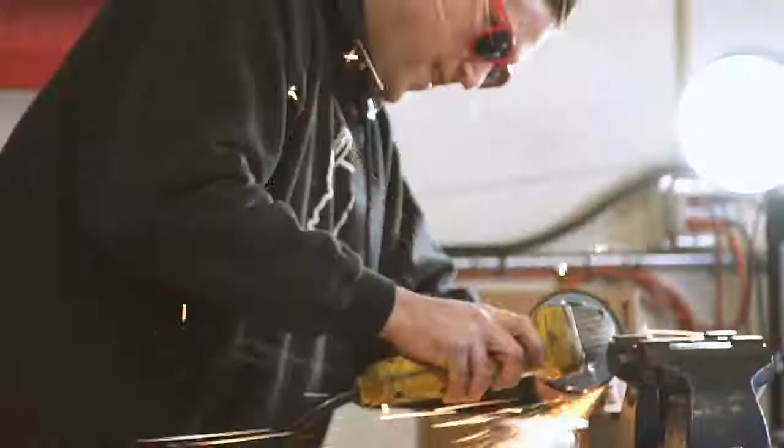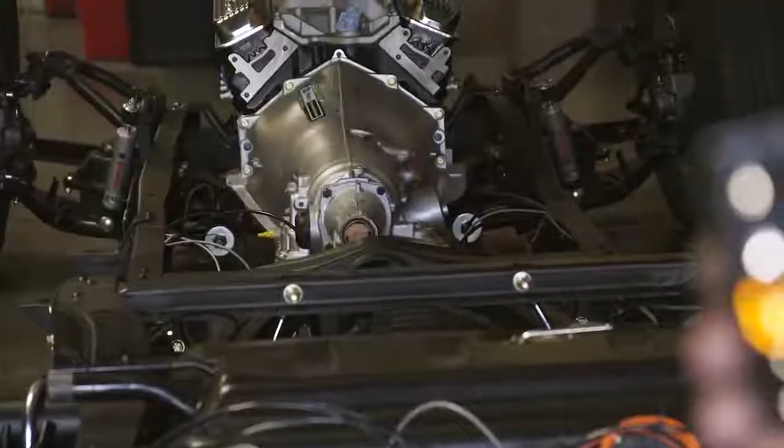Working on Dino's 1965 Chevy Suburban, finishing up the suspension on it now, frame off. So we've got all of it as a roller now here in the shop. Gonna put some AccuAir E-level on this one. We don't always get to install the E-level portion of it, but that's always the nice upgrade. The auto leveling system and the height sensors just take all the guesswork out of it, make it a really, really nice, reliable system. This was one that started out to be kind of a backwards build.

I was just going to do kind of a cool OG style stock truck, and then it kind of got boring. So that's when I got a spot with Switch, and I asked them to save me a month so we could finish it up. So we then pulled the chassis on it.

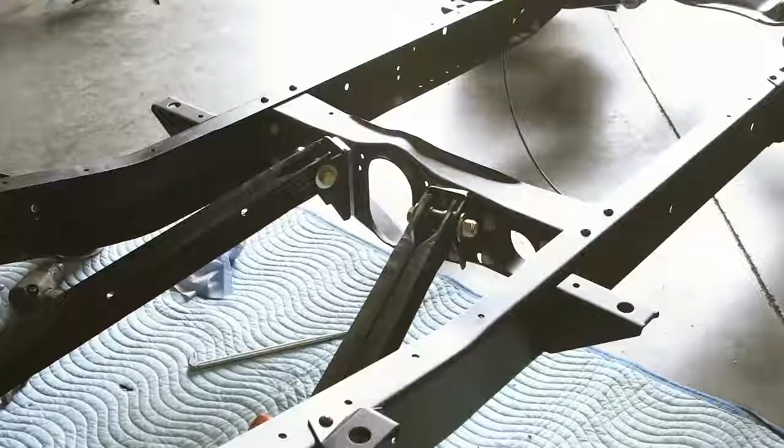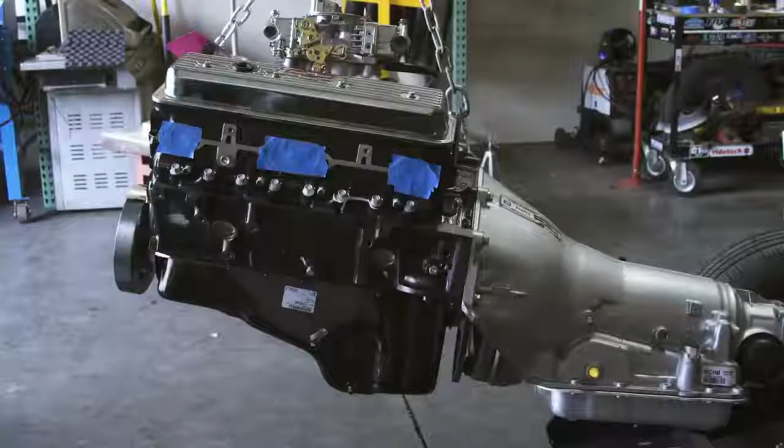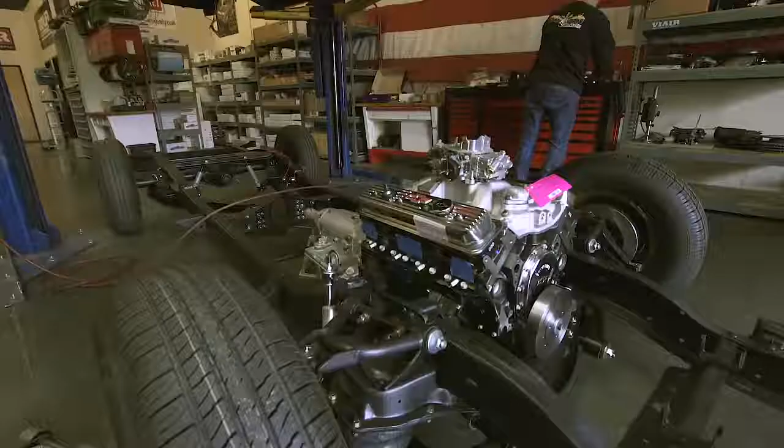So far, we came through, we put RideTech shocks on the front, Firestone 2600 series bags, RideTech strong arm control arms. That's all on a pancaked 2-inch pancake crossmember. McGaughy's 2.5-inch drop spindles, and that combination should allow this truck to lay the frame on the ground.

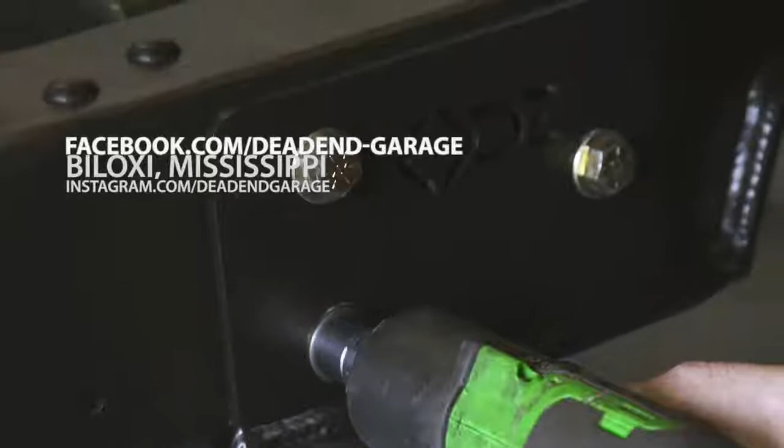The rear, we use some pretty trick little parts from Dead End Garage. The nice part about Seth and these guys, they like to use the best parts. And going with RideTech, I dig their stuff. I've used it on lots of stuff. This is the first thing I did the whole thing with, and of course AccuAir, don't get any better than that. This is also the first time for AccuAir that I did a full sensored truck.

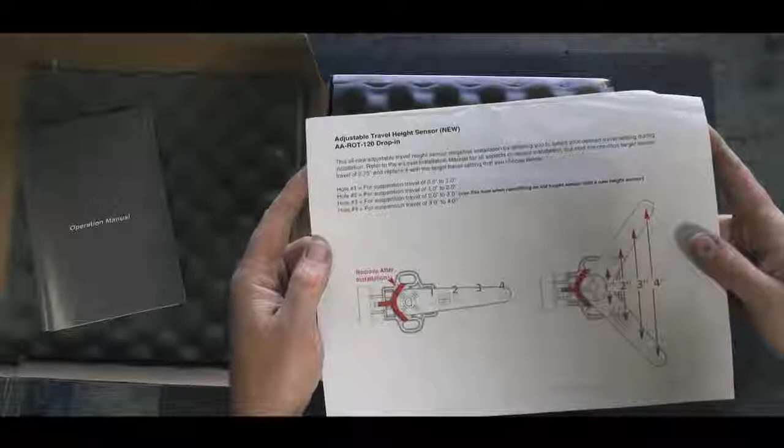Their installation manual, operation manual is the craziest thing. I mean, it's 30 pages long. Everything makes sense in clear written English. It's hard to mess this product up.

This is a sensor harness.

So here's the hardware. It's always bagged nicely. It's just bitching the way they do it. Everything's labeled perfectly. It's everything you need, nothing you don't. There's one for each corner, all bagged individually. Always have lock washers or locking nuts, washers on the face. They just go above and beyond.

Here's your height sensors. You got one on each corner of the vehicle, so 4 total. That's what tells your suspension where it's at in the travel.

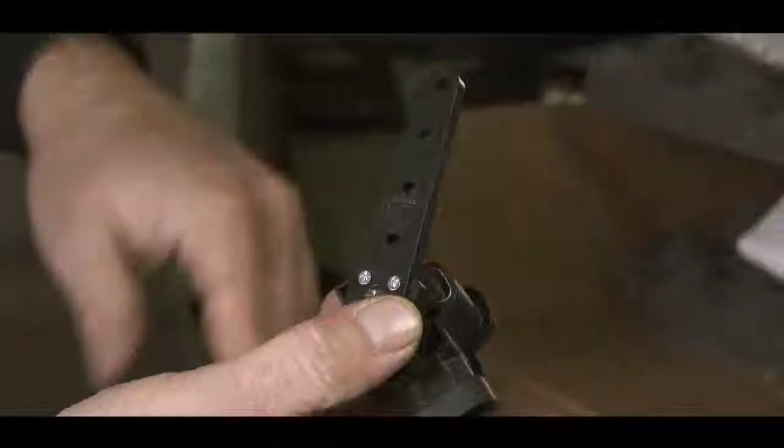Okay, so this plug here is for your controller. So that'll plug this end in, the other end's a USB. It'll go up to the interior and mount your controller into there. On Dino's Suburban, we're gonna mount that in the dash. A company, I think CTP Concepts, makes a bitchin' little plate for these 60 to 66 trucks. This mounts right on the dash, super clean. So we're gonna go ahead and use that on this build.

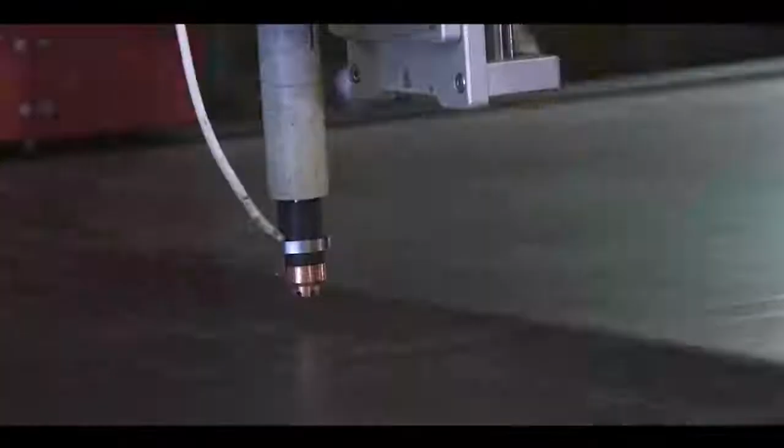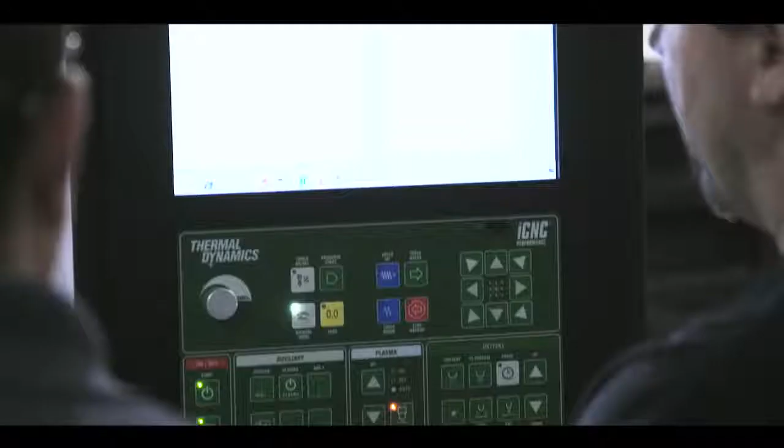Five by 10 plasma table with a water bladder system. Runs NEMA 34 servo motors with a 10-to-1 planetary gear set. Rack and pinion uses our precision linear guide rails. Ball screw on the torch mount, collision sensors. This machine has a PowerMax 85. It runs the iCNC performance controller from Thermal Dynamics. Powder coated finish on the table and the gantry. We're gonna cut some plate for you guys today.

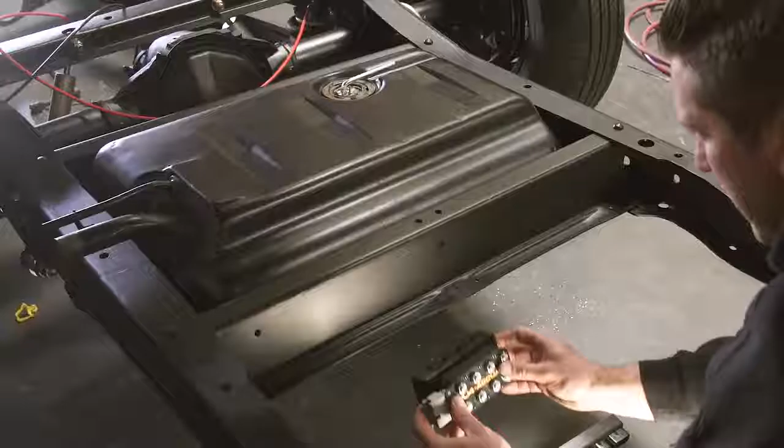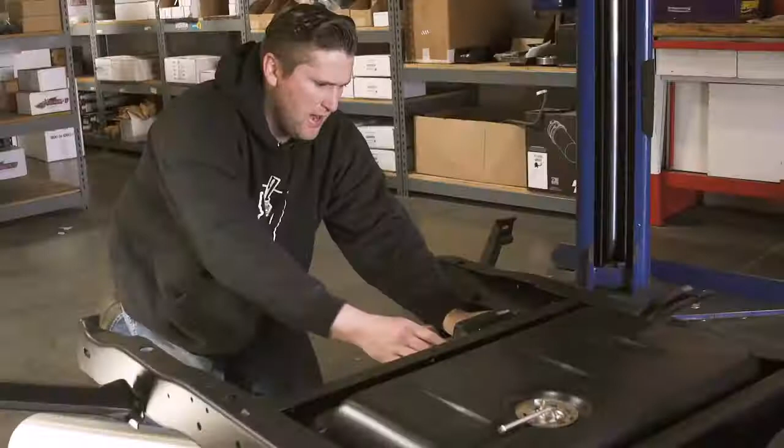I think we'll be able to make that work. So this is the VU4 valve. We want to make sure that it's in a spot that's not going to get hit with road debris, water, anything else that could come in contact with it, and make sure that it stays clear of where the floorboards are going to be.

AccuAir computer, ECM. We'll try and mount that on the cross member as well. After that, then we just have a tank and compressors, and then we should be done.

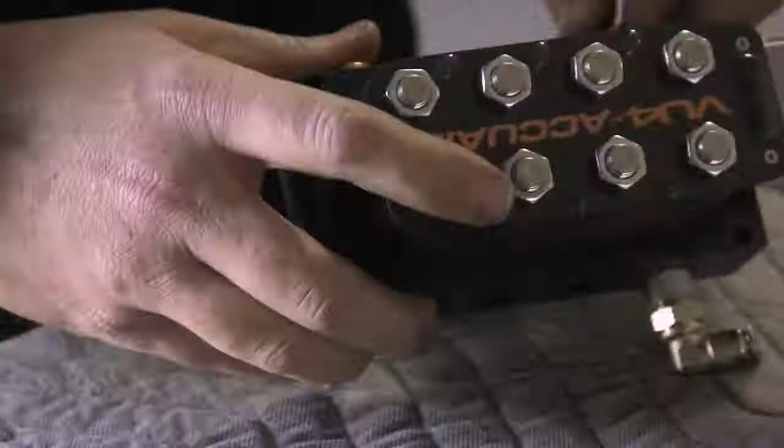I'd say plug one side. I don't want to run two inlets, just plugging off one of the inlets. There's two inlets on them, so you can come from whichever direction you want. Since we're going to come from the passenger side of the truck, we'll block off the driver's side. Now the instructions say use a drop.

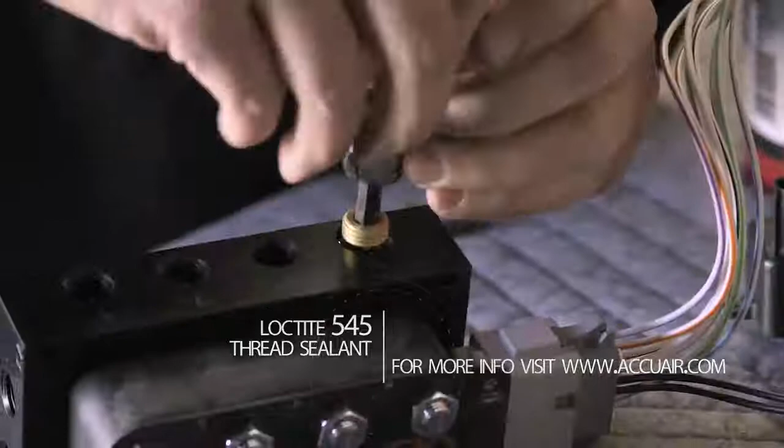The 1, 2, 3, 4 on the side of the valve is going to be the same as your wire numbers. There's going to be your sensor 4 as they labeled it there, and obviously that's going to go to number 4 on your port. And that'll go to the passenger rear, number 4, right? Yeah, so number 1 will be the driver front. That's that.

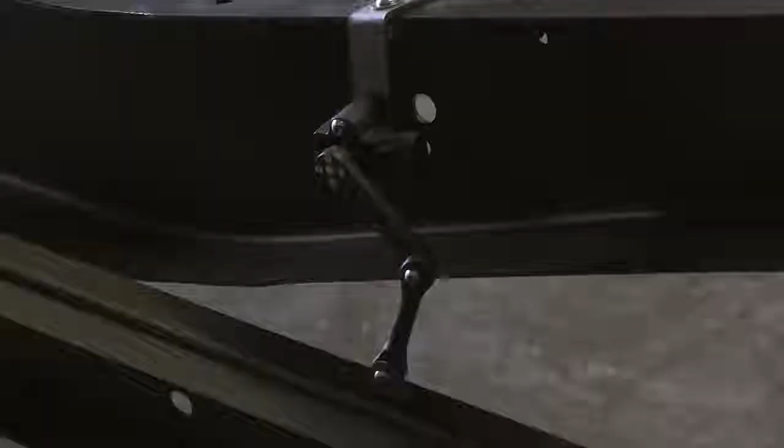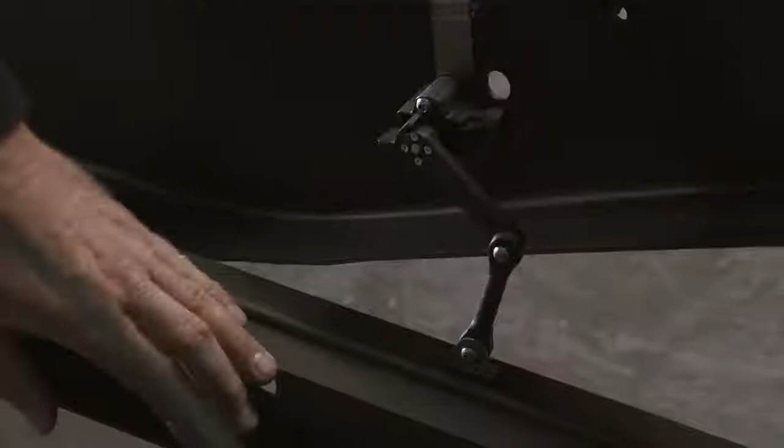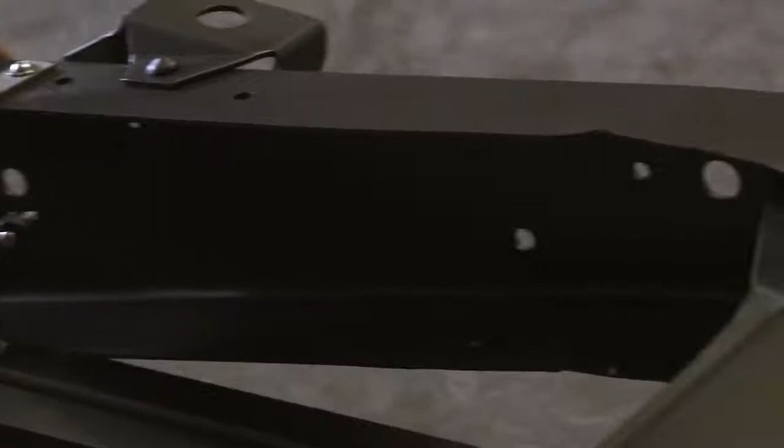So AccuAir supplies you with these gauges that you put in there for mock-up, and you want to make sure that the travel on the sensor is equal to the travel in the suspension. So right now we're all the way up, dead even where we want to be in our sensor travel. So when we air down, we want to make sure the bags are fully deflated and all the suspension's taken out. And again, we're very close to where we want to be in the range of motion for the sensor, matching that to the suspension.

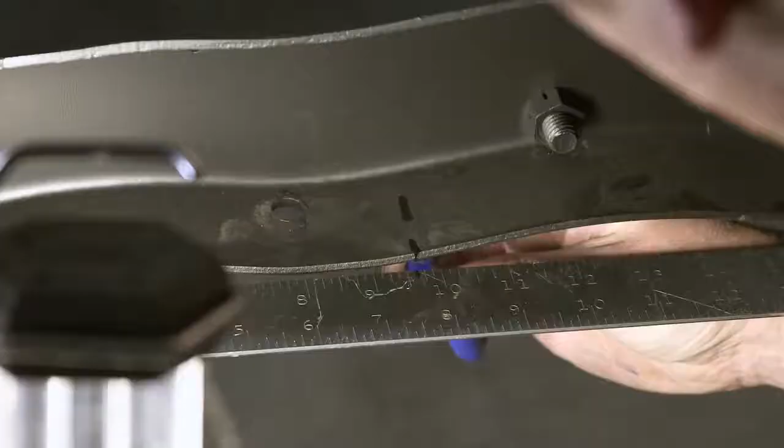Okay, so I don't want to go up. See, if I go up, I start hitting. Right, so that's got to be sideways. Drill a hole for our cross member.

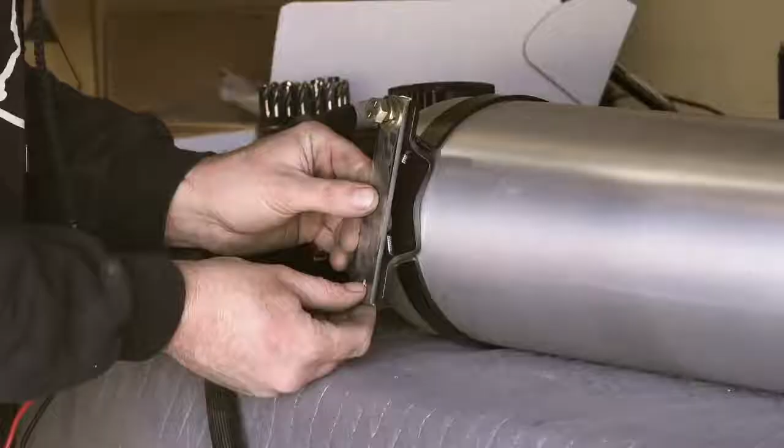Cool, man, that's it. 3 5/8. Okay.

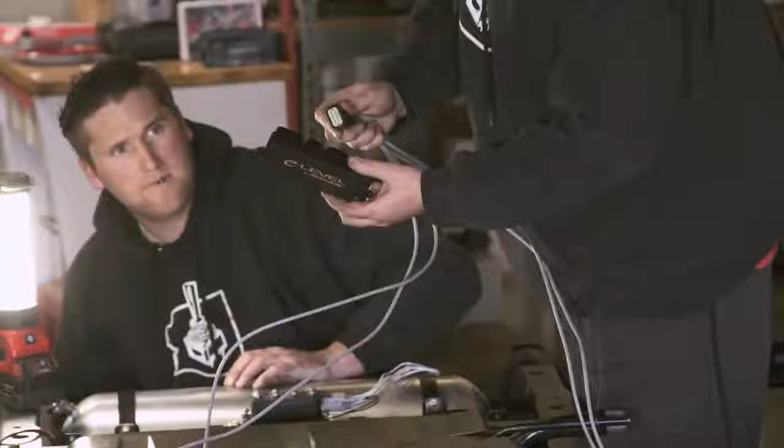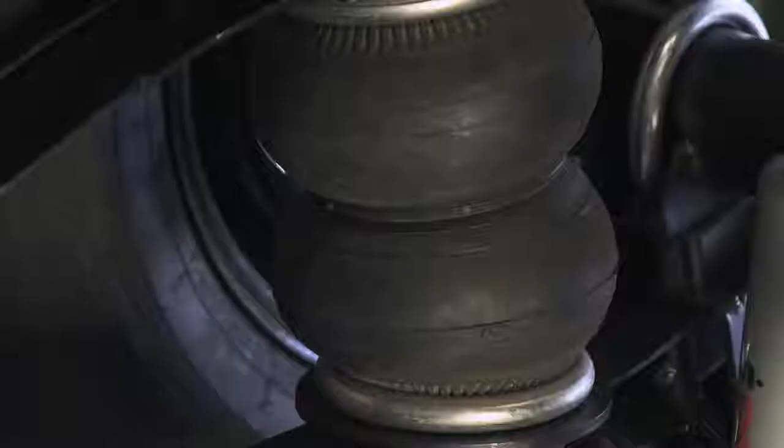So right now it's programming itself, so it's going to put a maximum amount of air in the system, and then it'll just cycle the travel. The sensors that we had mounted on each corner, it's going to watch that range and calculate it, and that way it knows exactly where the car is sitting. It'll pre-program your ride heights for you, and then you could change them if you wanted to. But generally it does a really good job of setting it where you're going to want it.

So right now it's lifting each side, each corner, to see what effect that has on the suspension. So what's going to happen is we're going to watch the vehicle go through its range of travel. It's going to do some testing all on its own and cycle the suspension. This test normally takes 5 minutes or less. So watch, you'll see it air out.

So sick, huh? I fucking love this. This never gets old to me, man. So cool.

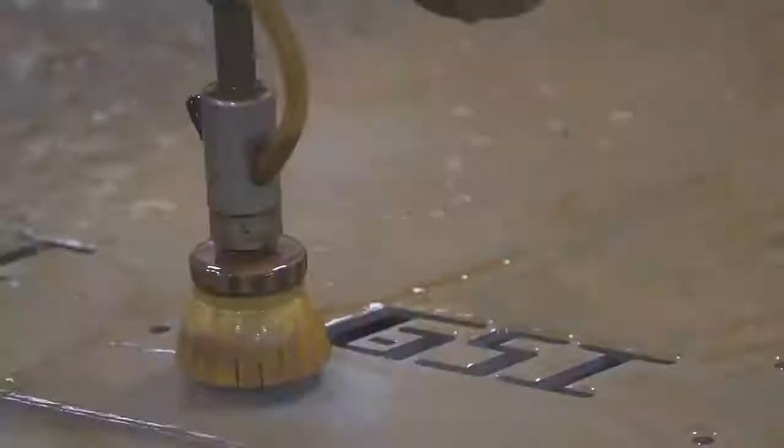Using this supplied template from the guys over at AccuAir, I was able to create this basic mount for our Endo VT.

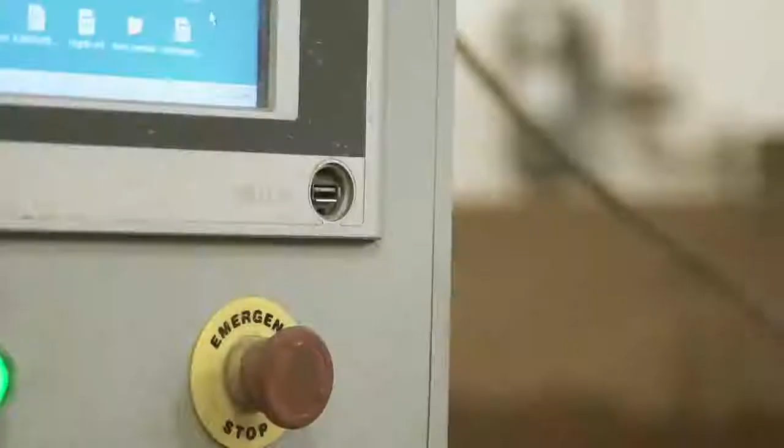What I'm going to do is take this file over to WaterJet, cut it out of some 3/16 plate, sort of fit it up to the back of our display chassis. We're taking it to LST in a couple days, and if all goes well, we'll be able to bolt the tank right to it, get it mounted, and have a nice, cool little setup for the show.

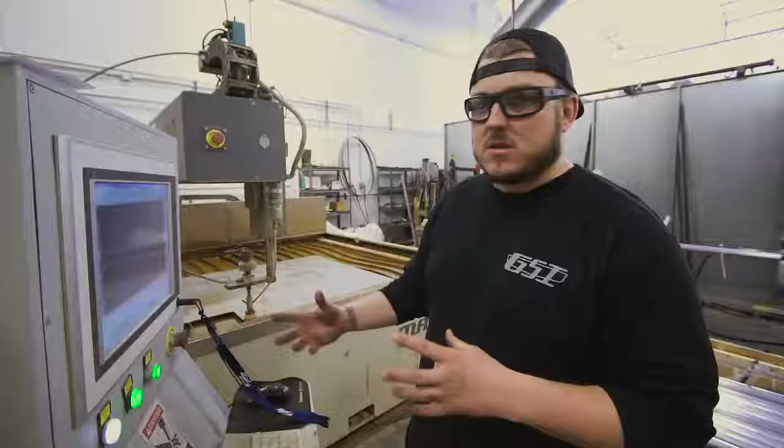All right, so now I got the file from the GibbsCam program, put it into a DXF format. I'm going to put it into this computer here, translate it into our flow software, create a cut path, send it to this water jet, and cut it out.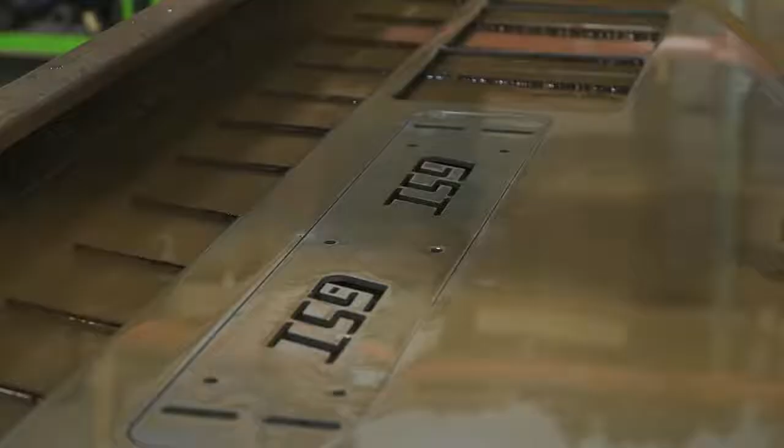We'll clean it up a little bit, see how it works.

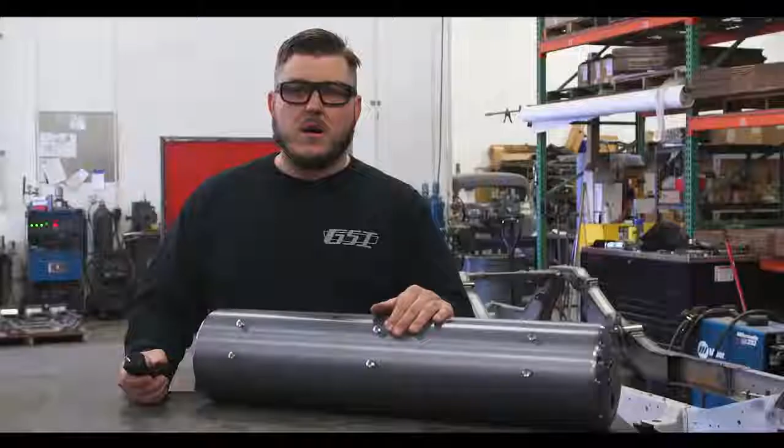Now that we have our mount fabricated and tacked onto the chassis, we'll take these feet, the little plastic mounts that AccuAir supplies with the endo tank. You bolt them to your mount, then drop them right in place. You can rotate the tank and they click right in place. A set screw keeps everything nice and tight so it won't move around, vibrate, or rattle. This is nice.

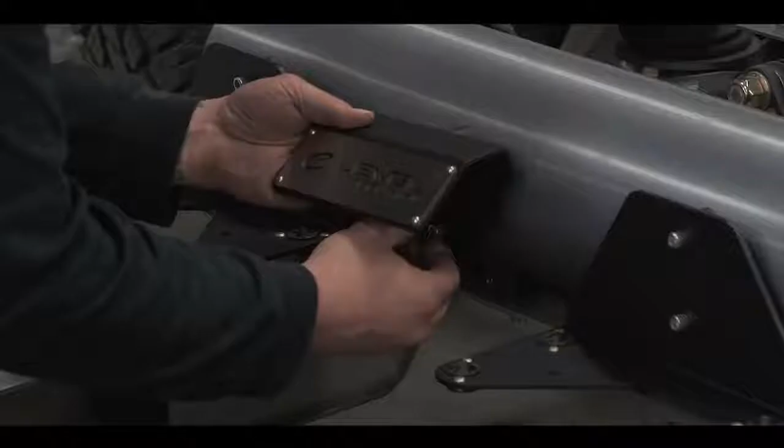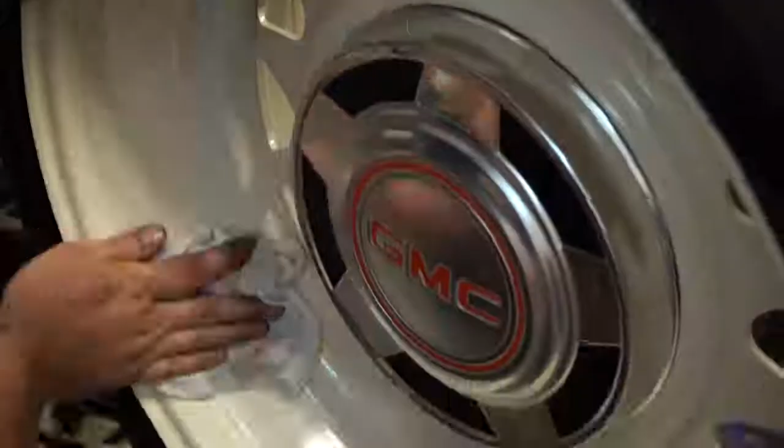It's not really a problem, it's kind of expected. But since I flipped the wheel, making a wider lip and changing the offset, I now have to narrow my rear end. Which is fine, it's just a little more money and time. This thing's already taken forever, but whatever. It's all good, it's part of the deal I guess.

So I made a cool disc brake conversion kit for the rear. I'm happy about that, my wheels look rad. Now I just gotta suck everything up.

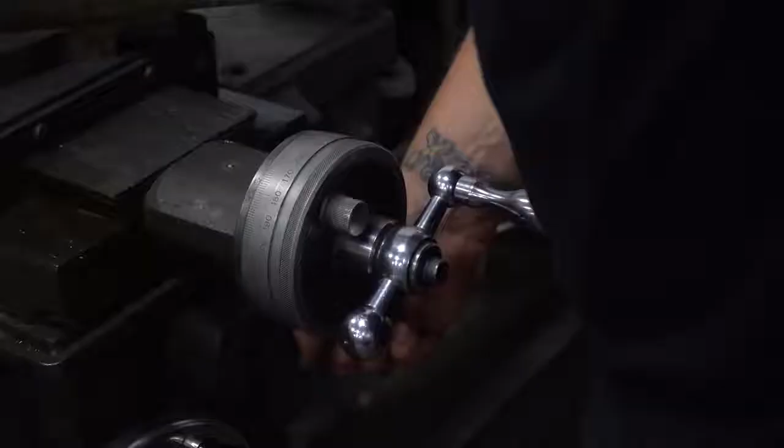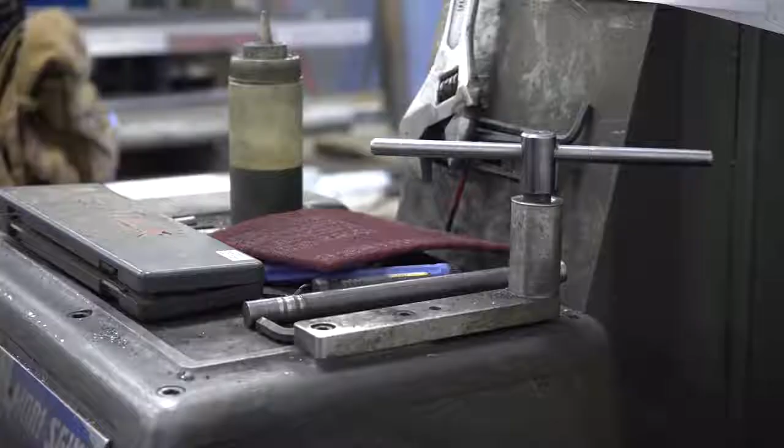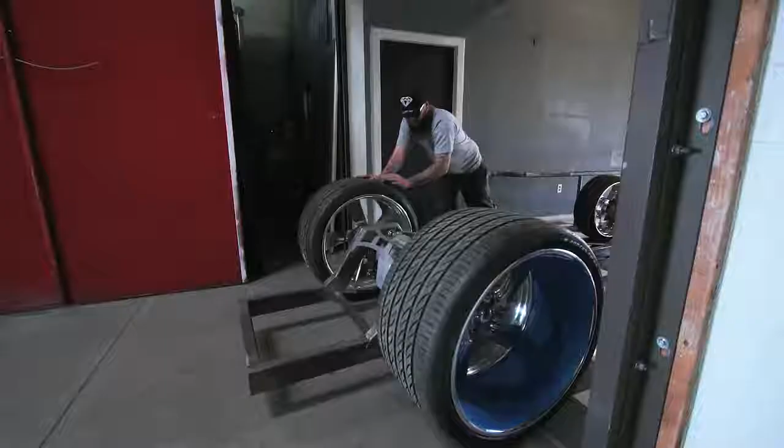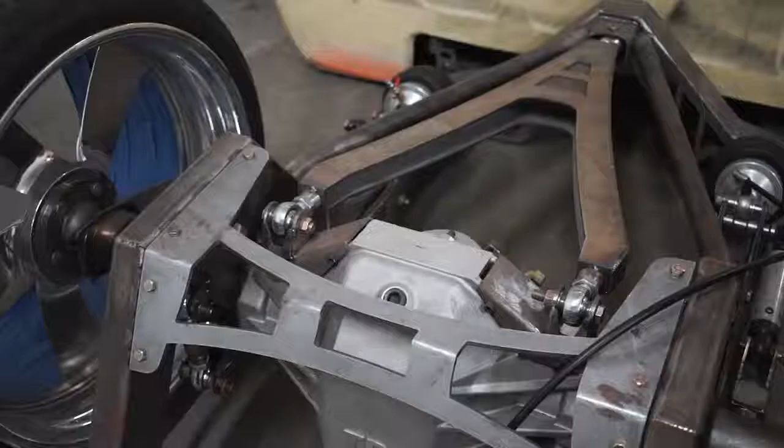On the back, I wanted to make everything super detailed. We did simple rails, but I wanted all the arms, all the bags set up, the bell crank, all that to be super detailed. So we ended up machining a lot of parts, a lot of machined spacers, a lot of time on the CNC, a lot of TIG welding. Just to be different. I want it to be high end, work good, look super good, and get everyone to like it, you know?

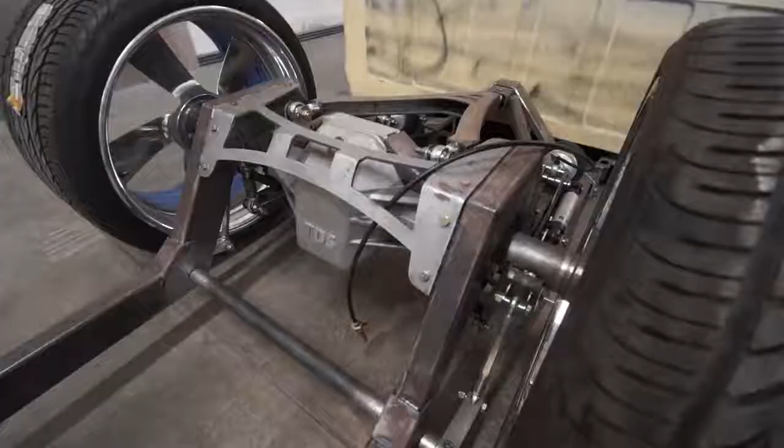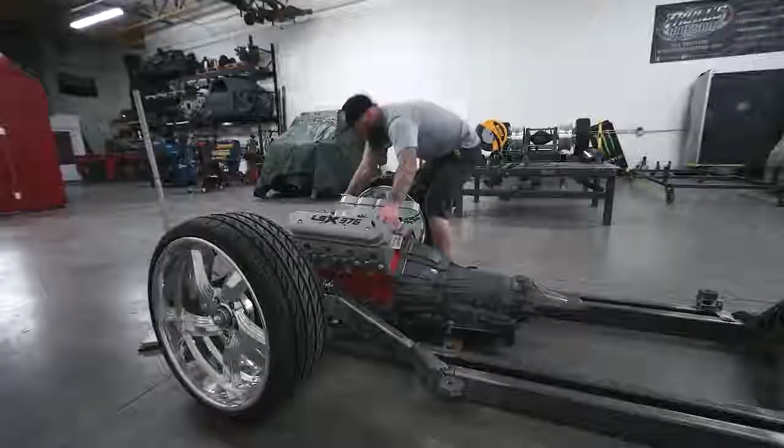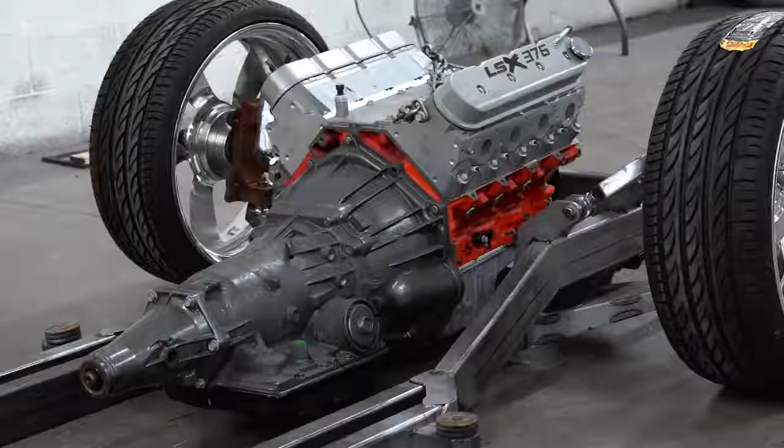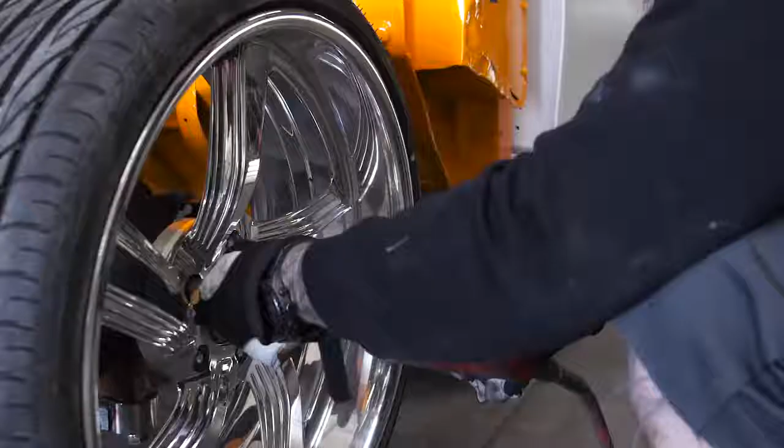So the front end, we took a little bit different approach, and we used a sleeve bag style up front and some tube work. Now we're gonna go back, make it 100%, move the brackets, make new ones. We want to get all the lift that we could possibly get so we get as much performance out of it as we can.

Endo by AccuAir. The patent-pending Endo tank is the world's first modular air tank system. Its 6 3/4 inch diameter extruded core yields outstanding strength and unique functionality, proven to withstand internal pressures of over 1,200 psi, making it the industry's first aluminum air tank to achieve a 200 psi DOT approval rating. Endo's uniquely integrated 400 psi blow-off valve further guarantees ultimate safety. All Endo tanks are available in industry-standard 3 or 5 gallon capacities, at 19 and 30 inch lengths respectively. Proudly manufactured in the USA, each Endo tank is hand-finished, assembled, and tested in San Luis Obispo, California. All Endo tanks are available in raw aluminum, black, gray, or bronze anodize. Endo's integrated quick-release mounting system simplifies installation and completely hides all mounting hardware. The extruded internal rails allow components to be mounted to the outside of the tank without the use of clamps.

Endo T. The Dash T, or tank variant of Endo, enhances conventional air management packages with external valve manifolds and compressors.

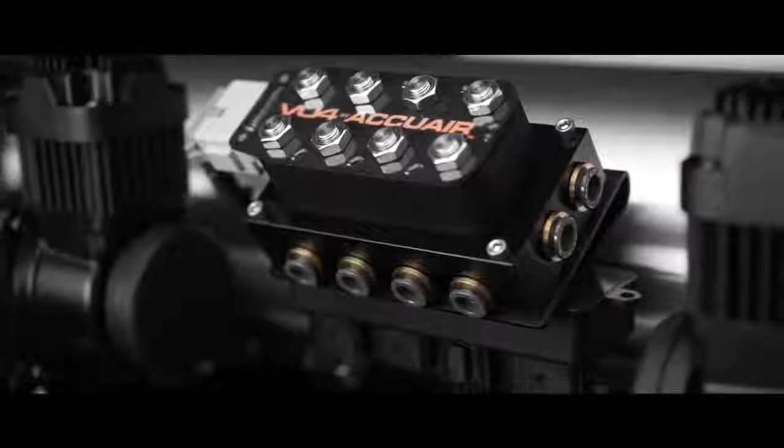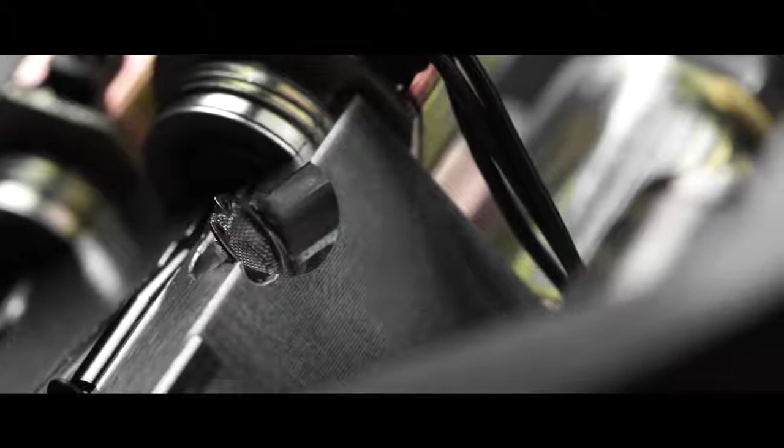Endo VT. The Dash VT, or valve tank variant of Endo, integrates the solenoid valves directly inside each of the tank's end caps. Each VT end cap has the ability to control 2 air springs. Fully filtered ports eliminate the chance of blocked or stuck valves from foreign debris. VT also has the only rebuildable and field-serviceable push-to-connect fittings for use with nylon tubing or aluminum and copper hardline.

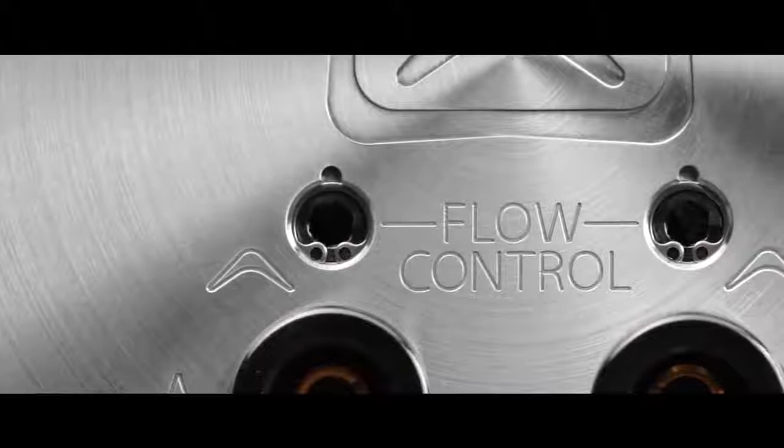Endo VT comes standard with built-in flow controls allowing precision fine-tuning of the lift and lowering speeds for each corner of the vehicle. A flush-mounted high-pressure and sealed valve connector makes wiring clean and simple. Endo T and Endo VT are available now.

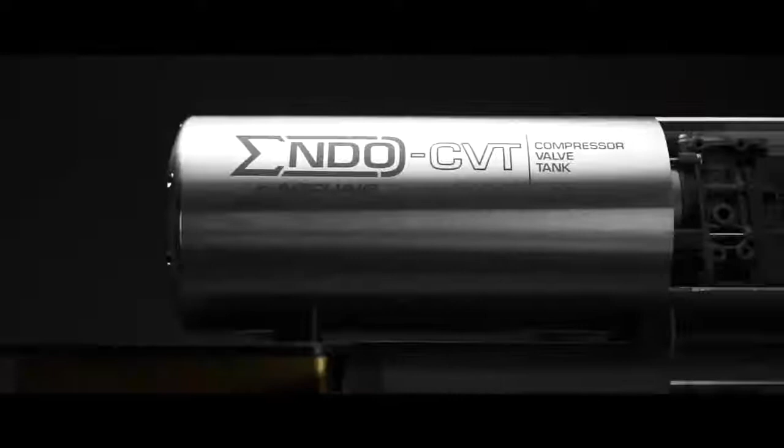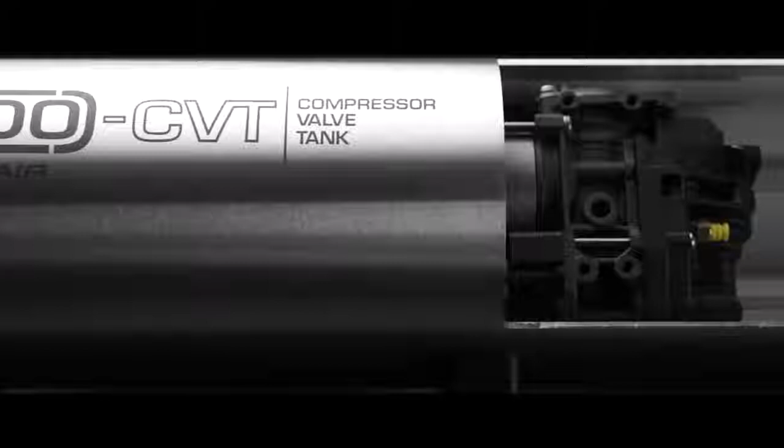The last Endo variant is currently in its final phases of development, Endo CVT. With an integrated internal air compressor, the Endo CVT, or compressor valve tank, will be the ultimate all-in-one air management package. AccuAir has partnered with leading OE manufacturer Wabco to bring a single compressor that will refill at twice the speed of current market standard units, while also outputting completely dry air to prevent moisture from causing frozen air supply systems. And most importantly, it will be nearly silent.

Endo T and Endo VT are available now. Endo CVT will be available this summer. All Endo systems will be upgradable to CVT. Endo by AccuAir, the modular air tank that is redefining air suspension by way of actual innovation.

Today we are going to install the door panel fillers, the door handle fillers that I got from Jason over at Suicide Doors. I've got this third brake light filler that I got from AVS. We're going to be putting that in as well, getting them tacked in and smoothed out.

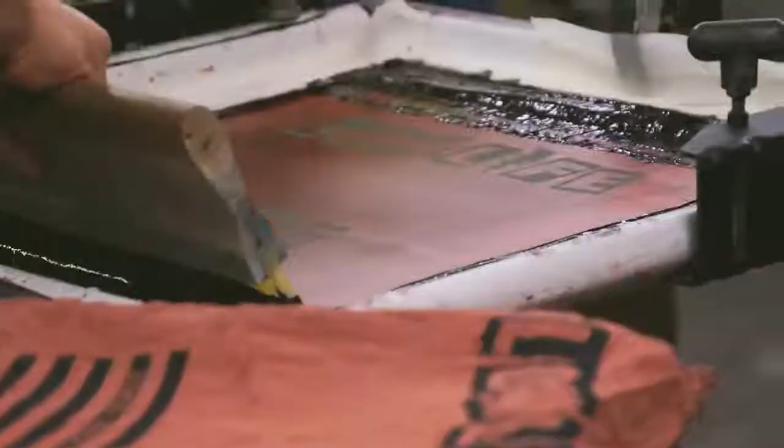Special appearance from Trevor White.

All right, so that's it for episode 1 of the Lowlife Show. Thanks for watching, I hope you enjoyed it.